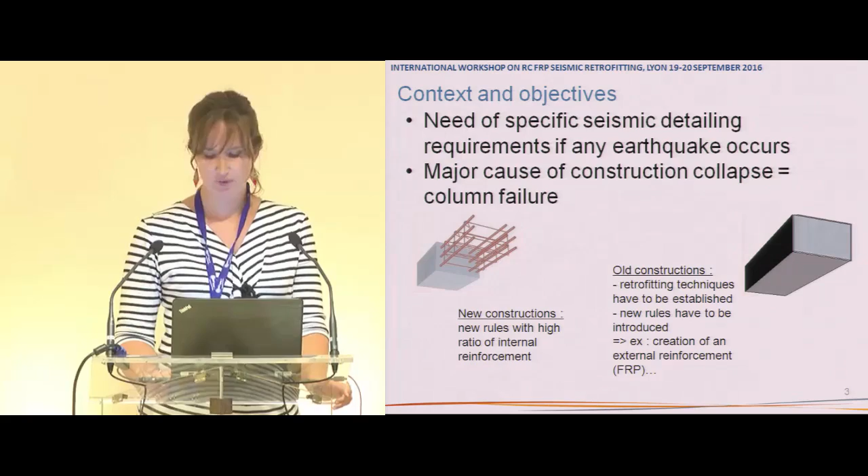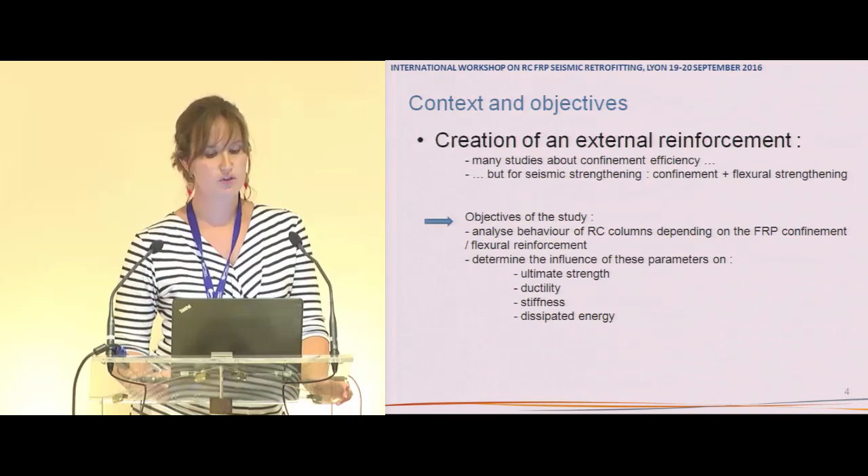Concerning external reinforcement, there are many studies about confinement efficiency, but for seismic strengthening we need both confinement and flexural strengthening. The objectives of this study are to analyze the behavior of RC columns depending on FRP confinement and flexural reinforcement, determining the influence of these parameters on ultimate strength, ductility, stiffness, and dissipated energy.

For this program, 8 real-scale RC columns were built in the laboratory. The columns have a height of 2.5 meters, with a large RC stub.

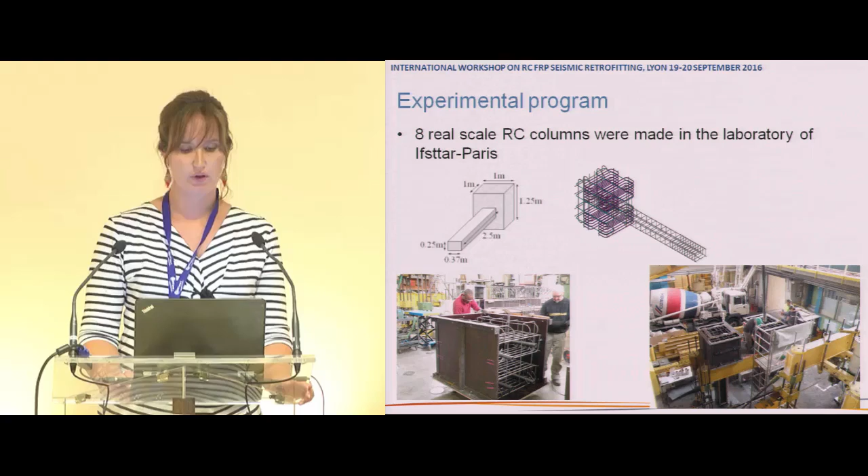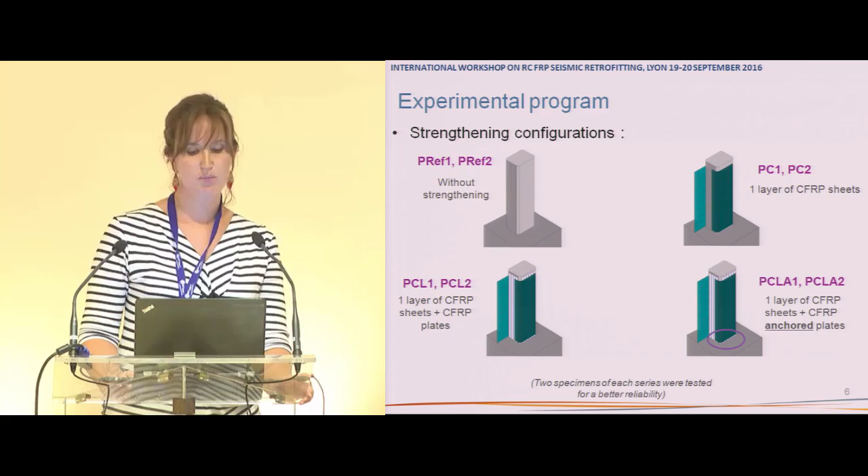We applied different strengthening configurations: the first without strengthening, then one layer of CFRP sheets, then one layer of CFRP sheets in addition with CFRP plates, and finally one layer of CFRP sheets with anchored CFRP plates. For each configuration we realized and tested 2 specimens for better reliability.

Some precisions about the last strengthening configuration: an innovative anchoring system was developed in cooperation with the Freyssinet company. From a usual CFRP plate, the end of the plate was modified so the carbon fibers are reassembled into a cylinder shape, allowing this end of the plate to be anchored in the stub.

Before being applied on the RC columns, this innovative system was first tested on small concrete blocks with shear tests.

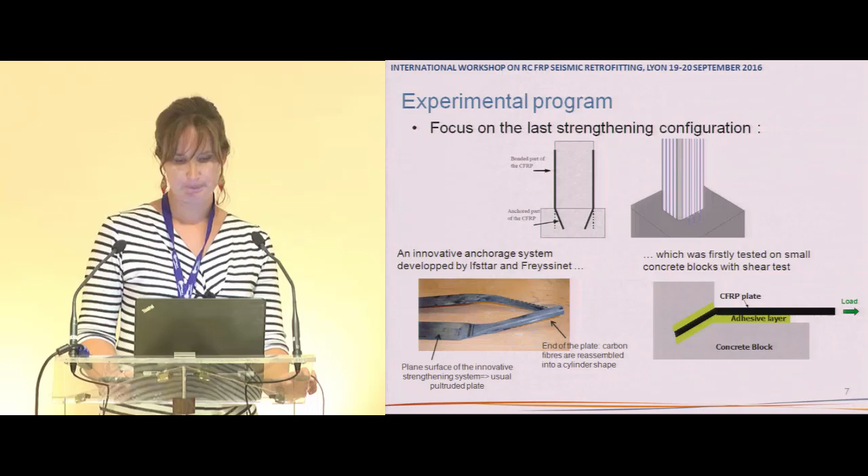Concerning the loading procedure, the seismic load is simulated by a constant axial load of 700 kN, approximately 20% of the axial load carrying capacity, combined with cyclic lateral displacement gradually increasing.

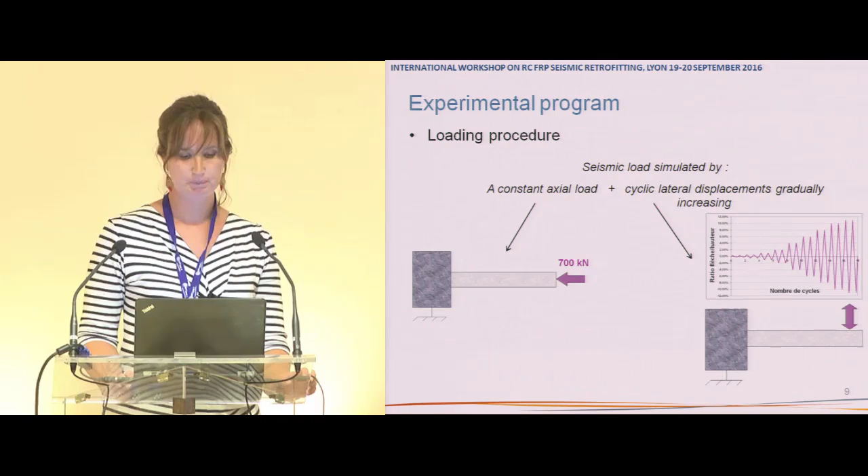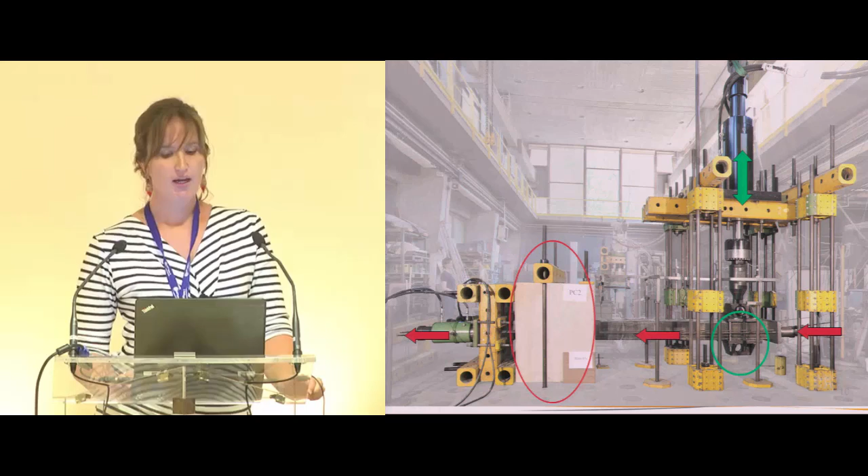Here you can see, in red, the system which applies the axial load with a pair of hydraulic jacks linked to pre-stressed tendons, and in green a bigger hydraulic jack which applies the lateral load.

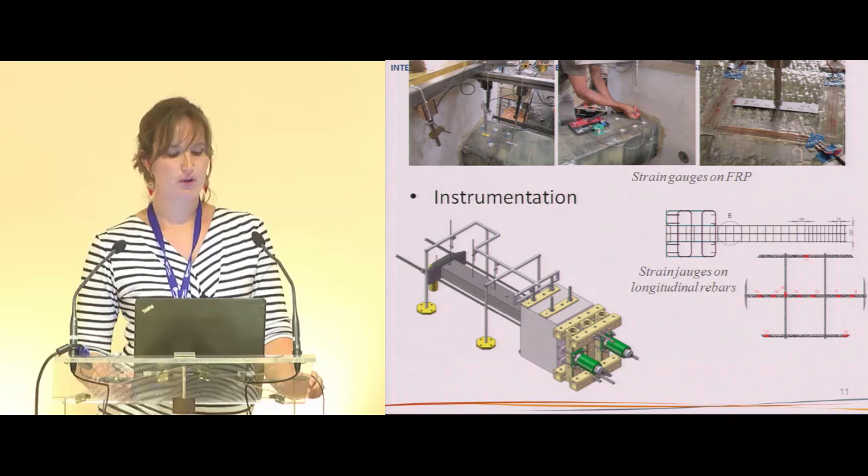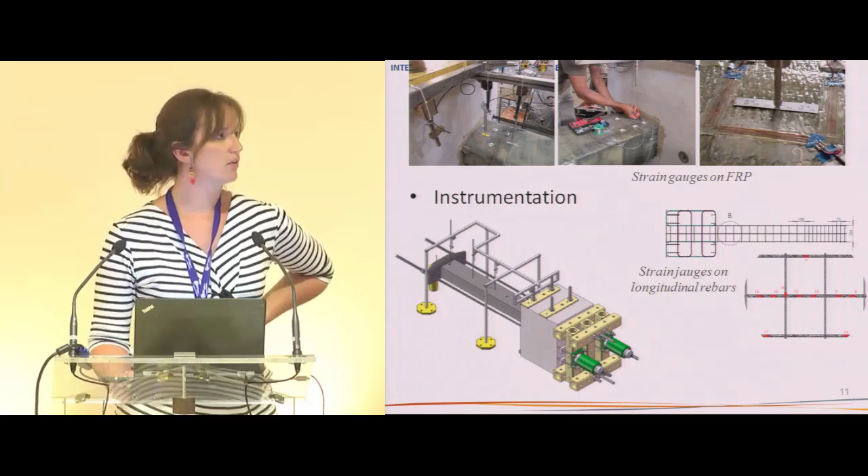Extensive instrumentation was displayed on the specimen: concrete strain, FRP strain at different locations, deflection along the specimen, and axial and lateral load were all recorded during tests.

Concerning the experimental results, for non-retrofitted specimens we observed significant spalling of cover concrete, buckling of longitudinal reinforcements, and a loss of vertical load carrying capacity at a drift ratio of 6%.

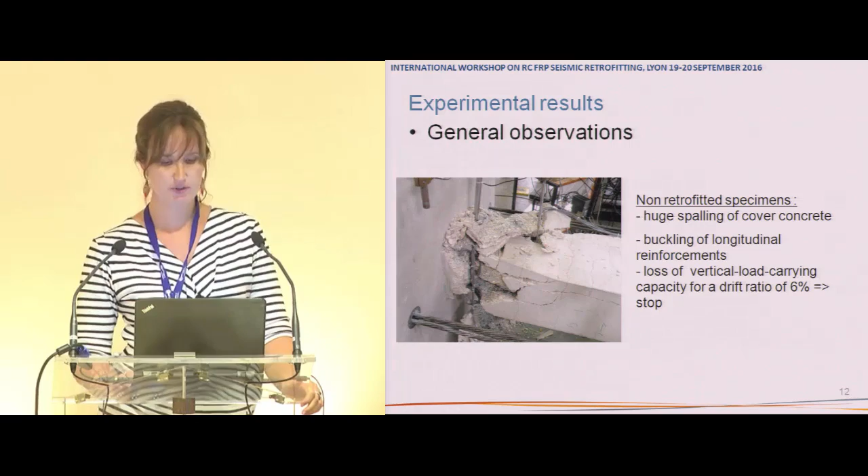For retrofitted specimens, we also observed significant cracking at the junction and the formation of a plastic hinge, buckling followed by rupture of longitudinal bars, with specimens tested until a drift ratio of 10%.

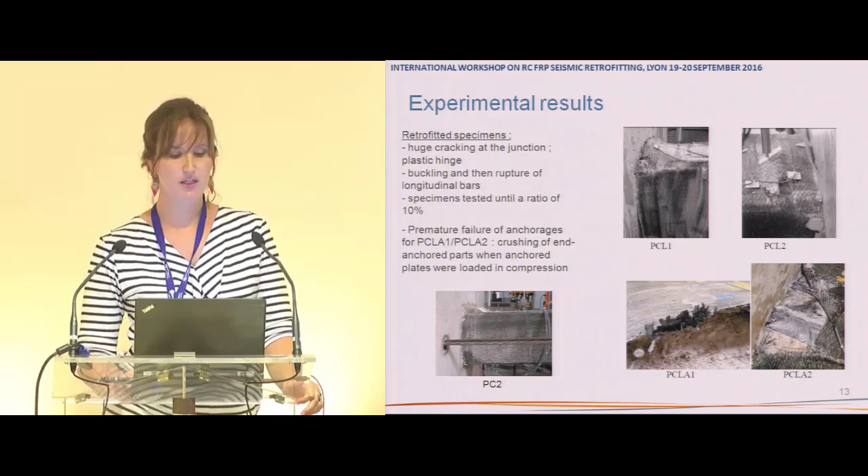More specifically concerning RC columns with anchored plates, we observed a premature failure of the anchorage with crushing of the end-anchored parts when the anchored plates were loaded in compression.

Here you can see a video of the test in progress.

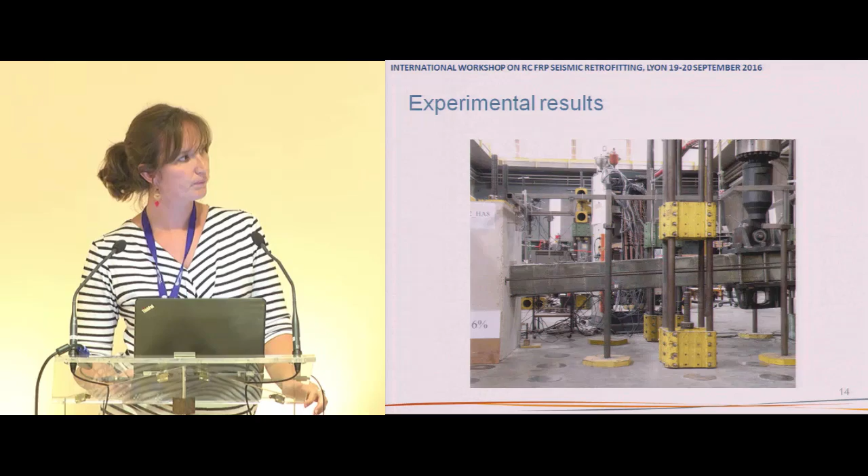If we look at the envelope curves, we can see that the ultimate lateral displacement for strengthened columns is about twice that of non-retrofitted specimens, showing that the strengthening configuration can enhance the ductility of the columns. We can also see there's similar post-peak behavior.

It seems that in our case the confinement is the main strengthening mechanism which can enhance the ductility.

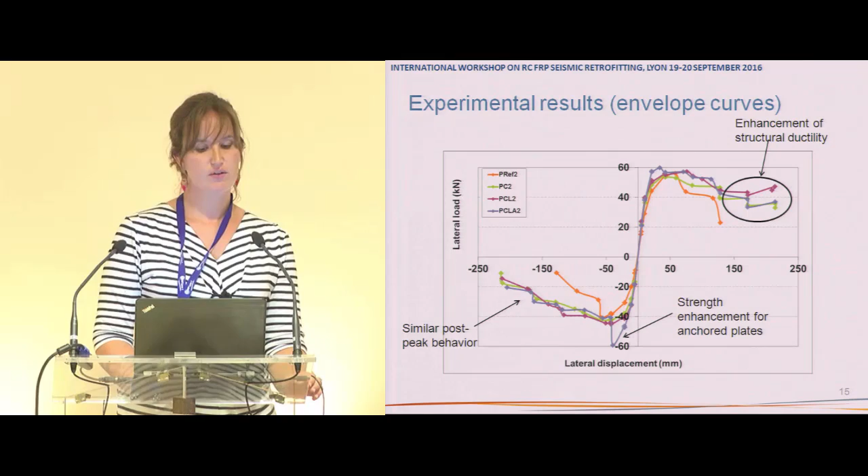We can see there's a strength enhancement for anchored plates of about 40% compared to the maximum lateral load of non-retrofitted specimens. But as shown previously, we observed a premature failure of the anchored plates when loaded in compression, so from that point the anchored plates become totally inefficient. That's why, after this strength enhancement, we find similar post-peak behavior.

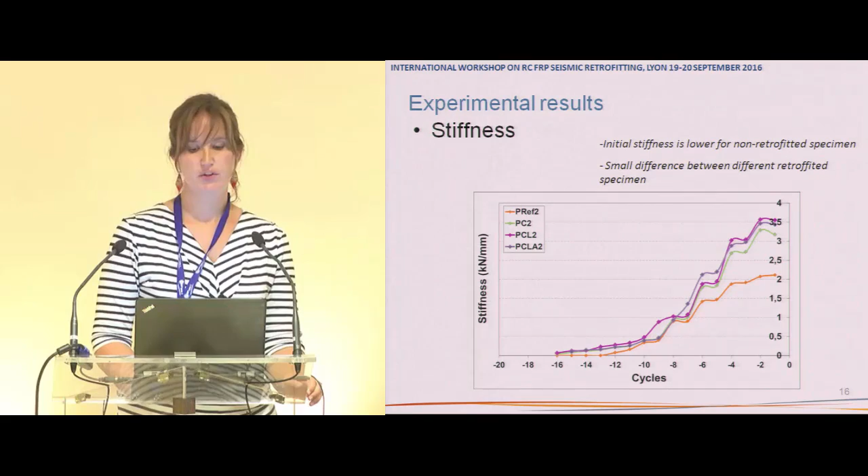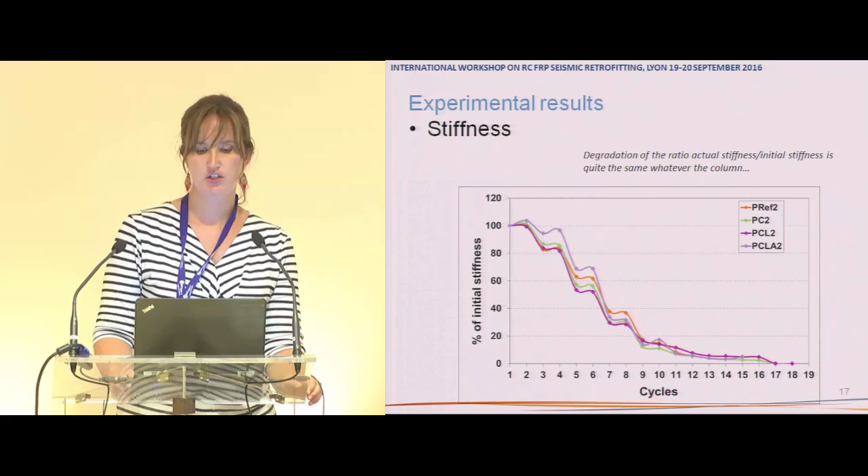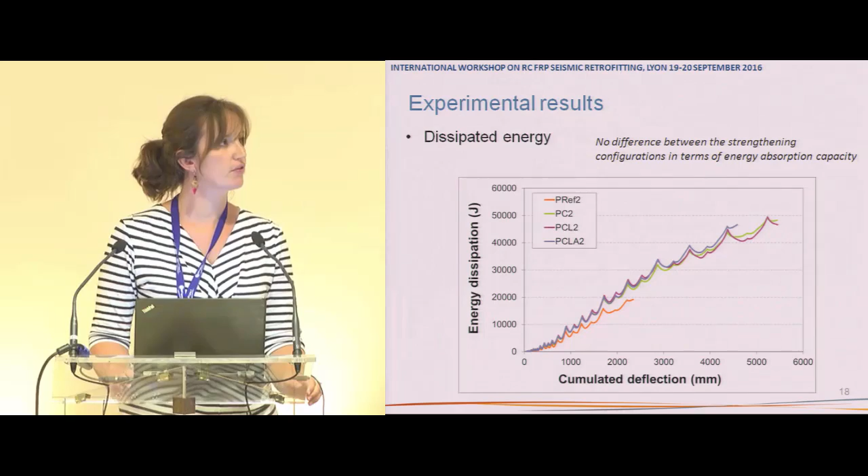Concerning the stiffness, we can see that the initial stiffness is lower for non-retrofitted specimens, but there's only a small difference between different retrofitted specimens. We can also observe that there's a degradation of the ratio of actual stiffness to initial stiffness. Finally, we observed that there was no difference between the strengthening configurations in terms of energy absorption capacity.

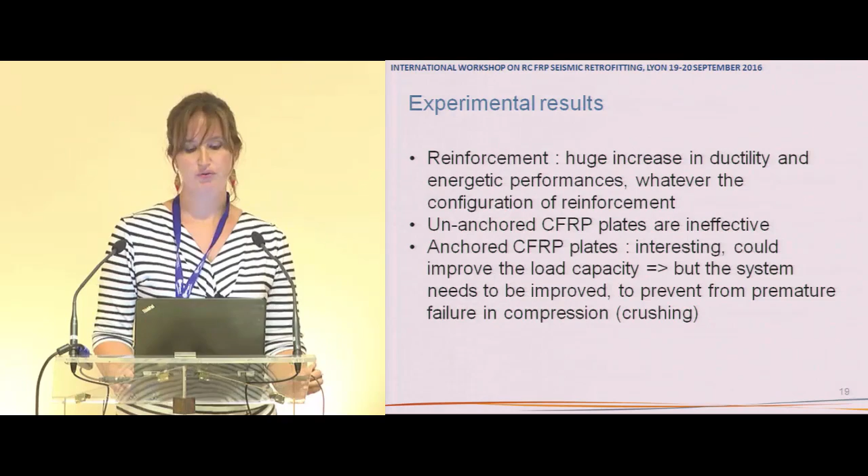As a conclusion to these experimental results, we can say that thanks to reinforcement we can have a huge increase in ductility and energetic performance, whatever the configuration of reinforcement. However, in our case, unanchored CFRP plates are ineffective, while anchored CFRP plates can be an interesting solution, improving load capacity, but the system needs to be improved to prevent premature failure in compression.

Now, if we have a look at design rules, we've seen that for ductile elements, and especially for columns, capacities shall be based on ultimate deformations, which are defined in terms of chord rotation. The works of Biskinis and Fardis served as the basis of Eurocode 8, and we wanted to apply these works on our specimens to check if theoretical results could correctly predict experimental results. So we calculated the theoretical chord rotation and drift for the different specimens.

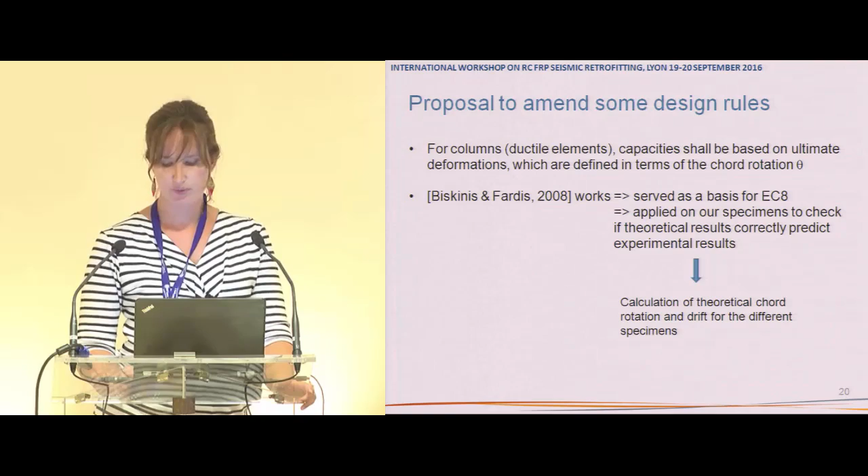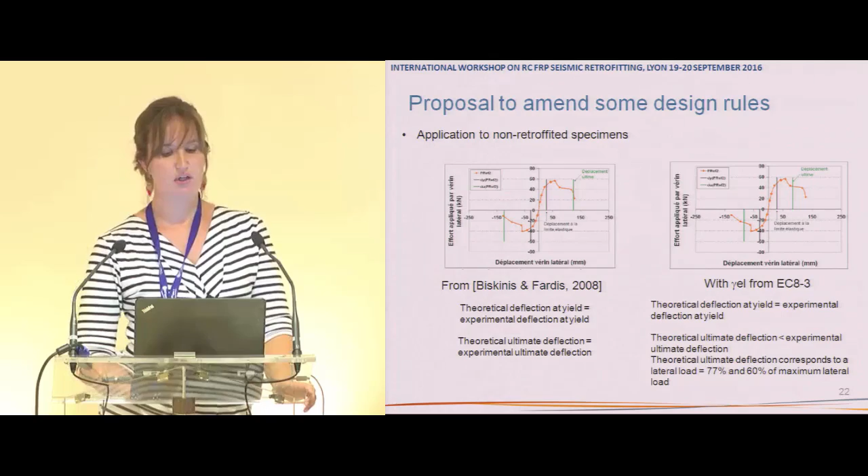If we plot this theoretical value on our envelope curves, we can see that the theoretical deflection at yield and the theoretical ultimate deflection are quite the same as the experimental ones if we use the formulae from Biskinis and Fardis. And if we add the safety factor from Eurocode 8, the theoretical deflection at yield is still the same as the experimental one, but the theoretical ultimate deflection is lower than the experimental one, about 77% and 60% of the maximum lateral load.

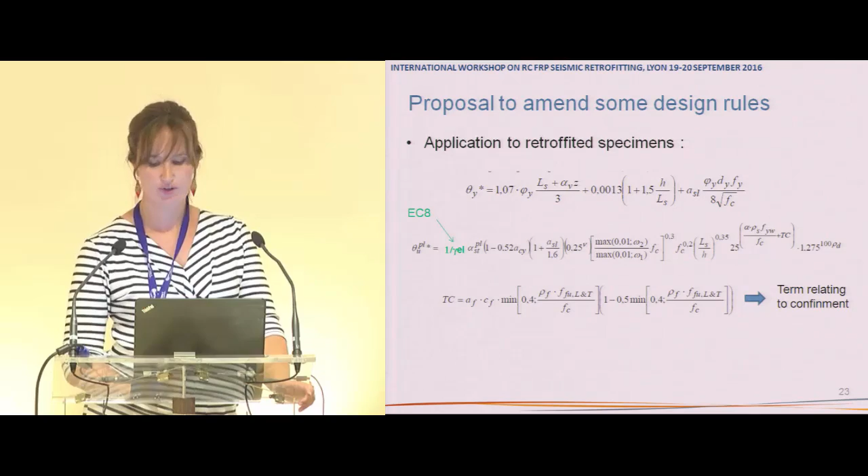Now for retrofitted specimens, here are the formulae from Biskinis and Fardis, with the introduction of TC, the term relating to confinement, and once again the same formulae are used in Eurocode 8 with the introduction of gamma el. If we plot these theoretical values on the envelope curves, we can see on the left that with Biskinis and Fardis works we have an understatement of ultimate deflections, which is underscored by the safety factors of Eurocode 8.

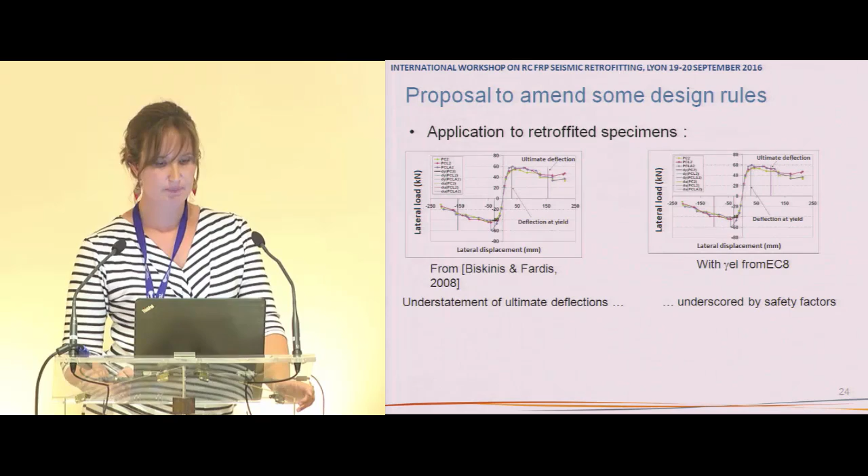Finally, we can say that the approach of Eurocode 8 is conservative, but it seems possible to adjust this theoretical value of the chord rotation according to the load drop which is expected, to have the same level of safety between retrofitted and unretrofitted specimens. So we've proposed a modification of the parameter CF in the term relating to confinement, which is expressed from our experimental results.

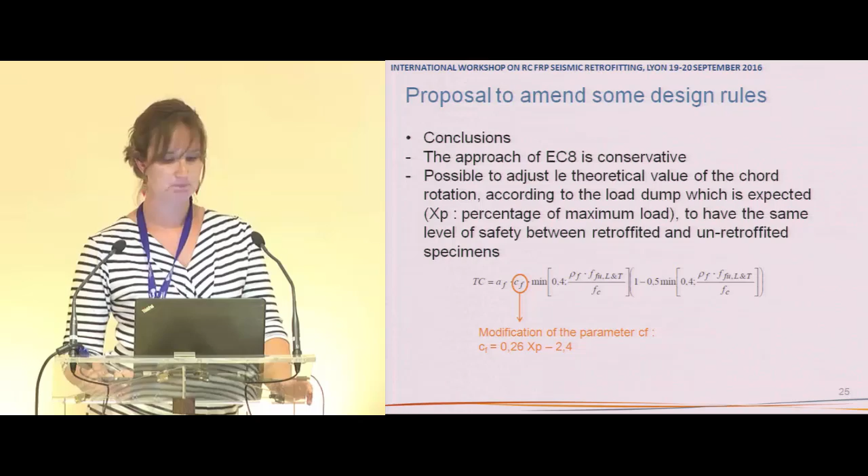Finally, we've seen that FRP could be a good solution for the reinforcement of columns, but it's also very important to reinforce the column-footing junction. That's why we developed this innovative anchoring system for CFRP plates, and realized an experimental campaign on 8 representative scale columns, unretrofitted and retrofitted with different strengthening configurations.

It appeared that we could have an improvement of ductility for retrofitted specimens. We also observed that the damage zone was concentrated at the junction of footing and column with the formation of a plastic hinge. Unanchored CFRP plates were inefficient, while anchored plates can provide an increase of lateral load carrying capacity, even if the benefits are limited due to premature failure of the anchorage by crushing. Finally, we observed a good approximation of experimental results with capacity design.

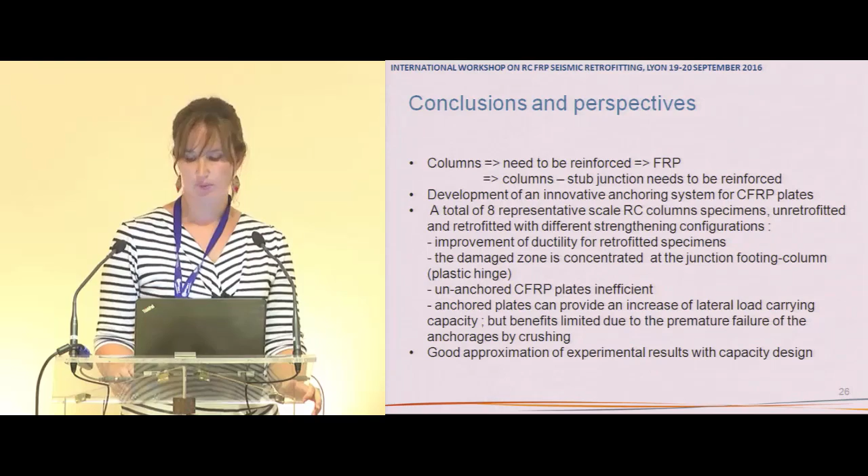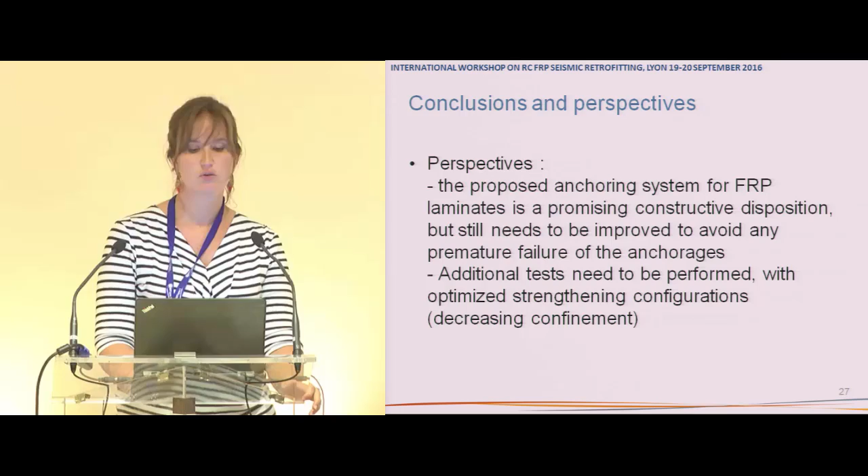The perspectives of this work could be to propose some improvements for the anchoring system of FRP laminates, and to make some additional tests with an optimized strengthening configuration, like a decreasing confinement, for example. Thank you for your attention.